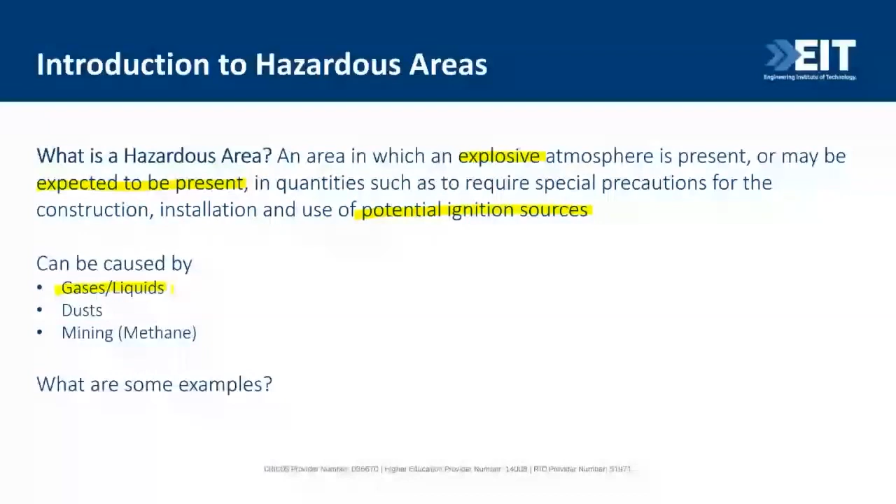So in each of these scenarios, you either have a hazardous material that is one of three things: it's a gas or a liquid that emits a gas, it's a dust, or in a special case you might have methane, which is related to mining.

So some other examples - we've run through a bunch of them, but now that we know it could be a liquid, gas, or dust, thinking of the context of refueling stations, that would be a liquid or gas example. In the context of grinding, or say flour or sugar refineries, that would be a dust that could cause a hazardous area.

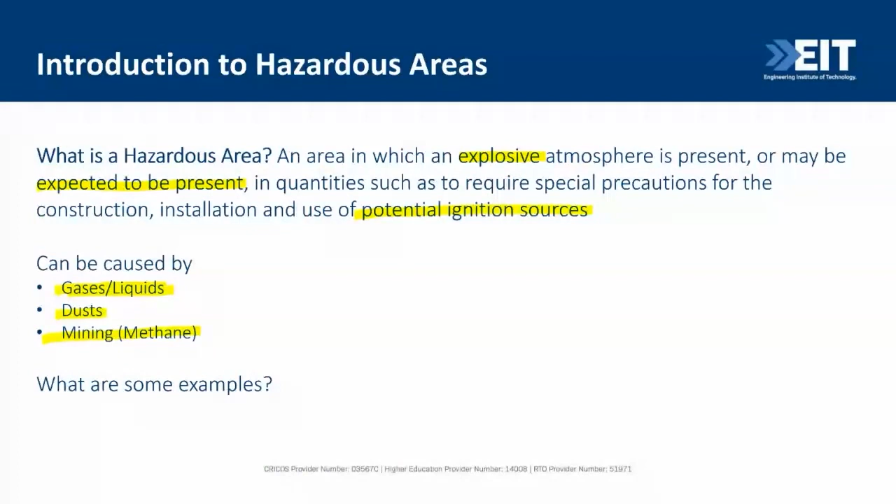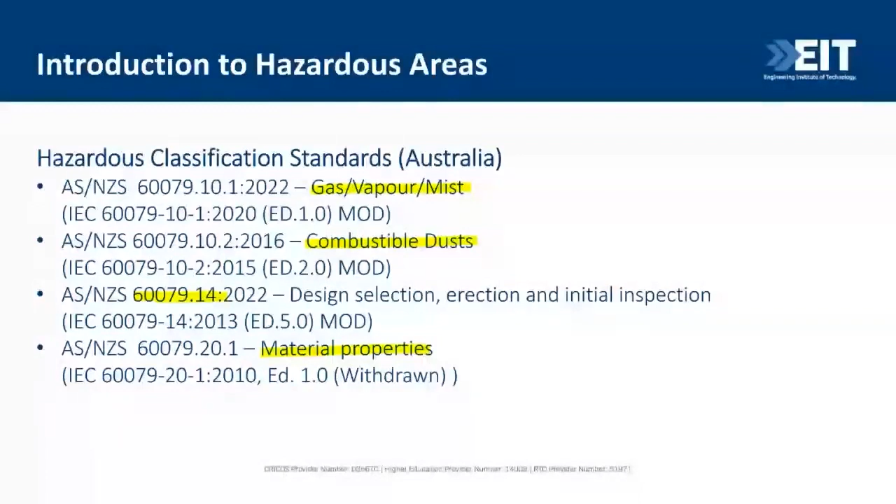So the standards applicable in Australia, which also correlate overseas to the IEC standards, are listed here. For each of those materials, they have their own standard. For gas, vapors, or mist, it's 60079-10-1. Combustible dusts have their own standard. Then there's a dedicated standard for those involved in electrical work - how you design, select, erect, or do inspections for hazardous areas, and that's Part 14 here in Australia. Lastly, there's a standard that gives us some typical material properties. It has been withdrawn, but it's often helpful just to get a bit of background.

A key distinction to understand is that when we're talking about liquids, gases, or dusts, they do not include explosive hazardous areas. So EHA are a different form of hazardous area, and they're covered by a completely different set of standards. For example, if you work in defence, there is a dedicated standard for how you classify and deal with explosive hazardous areas.

Now, another tricky word that people get confused is the concept of hazardous materials and dangerous goods, and they're often used interchangeably. The difference is dangerous goods is broader. So you could have dangerous goods that are corrosive, toxic, oxidizing, or water reactive, but they may not have the potential for a hazardous area.

So they're slightly different. If you want to classify dangerous goods in Australia, again there would be a relevant standard for the country you're in. We have a dedicated standard called the Australian Code for the Transport of Dangerous Goods by Road and Rail. So essentially there will be dedicated standards for dealing with dangerous goods that are separate to those we deal with for hazardous areas. That's the important distinction to take away from this slide.

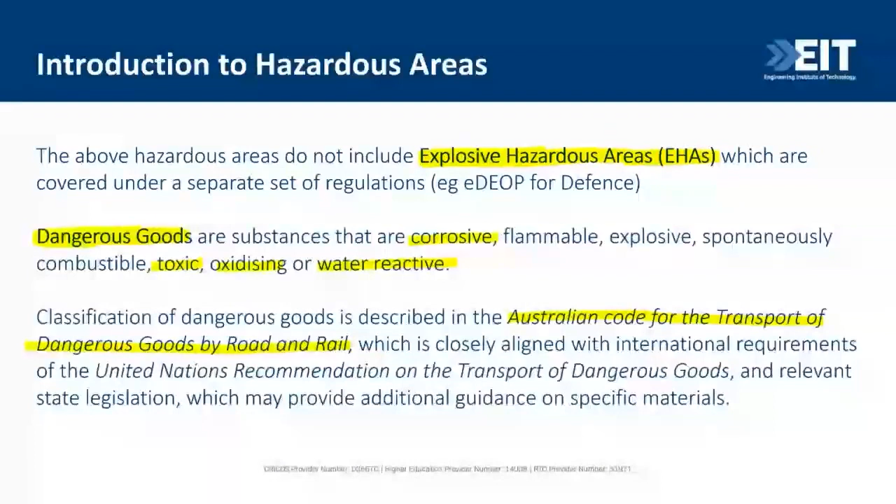Okay, so how do we get an explosion? Well, if we look at the fire triangle - or the infernal triangle - if you have a flammable liquid or a gas, this triangle is how we get an explosion. We take our fuel, which is often the gas associated with a flammable liquid, mix it with oxygen into a mixture with the right balance, introduce an ignition source, and then we get fire. Think of your old camping fire: your fuel would be your wood, you have oxygen in the air, and you introduce your ignition source. That's what we call the infernal triangle.

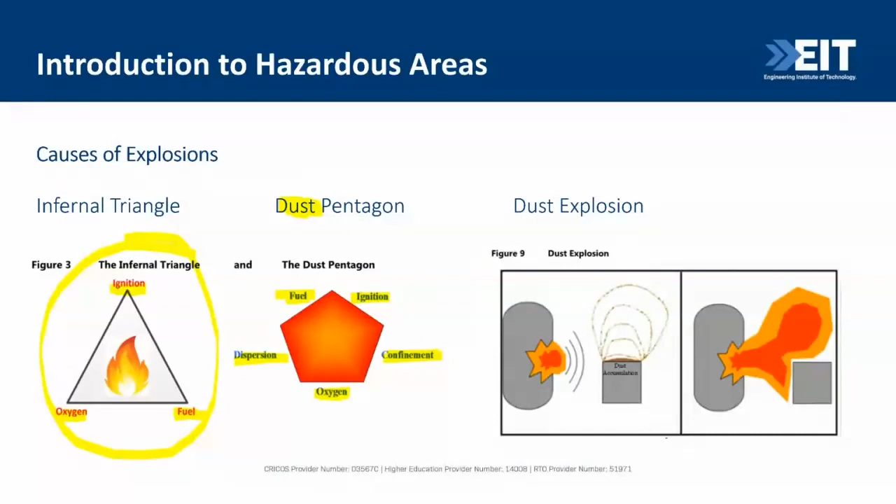So you need those three things to have an explosion. For dust, it's slightly different - we still need our fuel, oxygen, and ignition, but what we need for dust is for it to be dispersed in air and confined within a set space. Dust explosions are slightly different; they're often much more destructive because there is, funnily enough, more energy contained in a dust explosion than an equal amount of TNT. What's interesting is approximately 75% of man-made dusts are actually combustible, meaning they could represent a potential hazardous explosion when mixed with air in the right proportions with dispersion and confinement. We mentioned earlier sugar and flour refineries as combustible dusts. You can also get grain, linen, milk powder, coal, and metals - a lot of the dusts we often produce could be combustible, so you might have the potential for hazardous areas.

All right, so let's talk through the classification terminology. Essentially, the first thing we do is determine what's known as our zone, and we're going to go through all of these definitions in a second. But the first step is our zone. Then we look at whether we have either a vapor and gas, or a dust. Based on that, we apply one of our zones - so they're either 0, 1, 2 or 20, 21, 22.

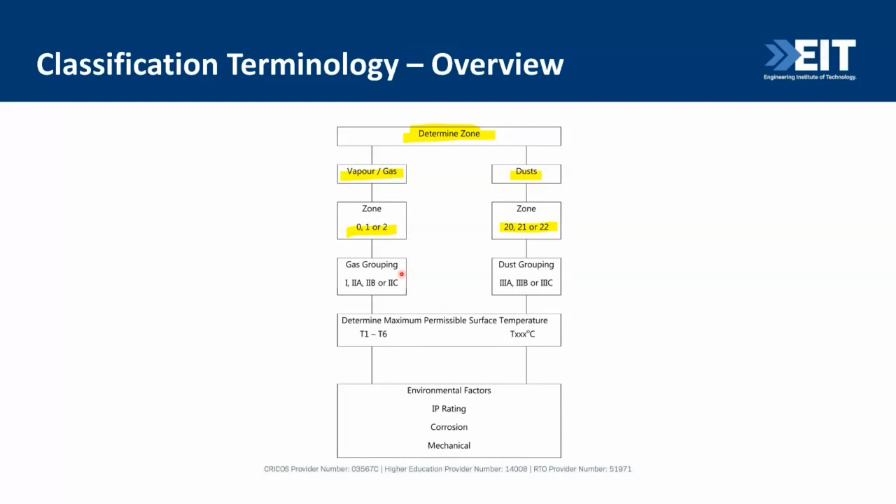So, 0, 1, 2 or 20, 21, 22, depending if you have gas or dust. We then assign what's known as a grouping, which is shown there. We then assign a maximum permissible surface temperature, so a temperature limit. Those are the first three terms that will be defined: your zone, your grouping, and your temperature limit.

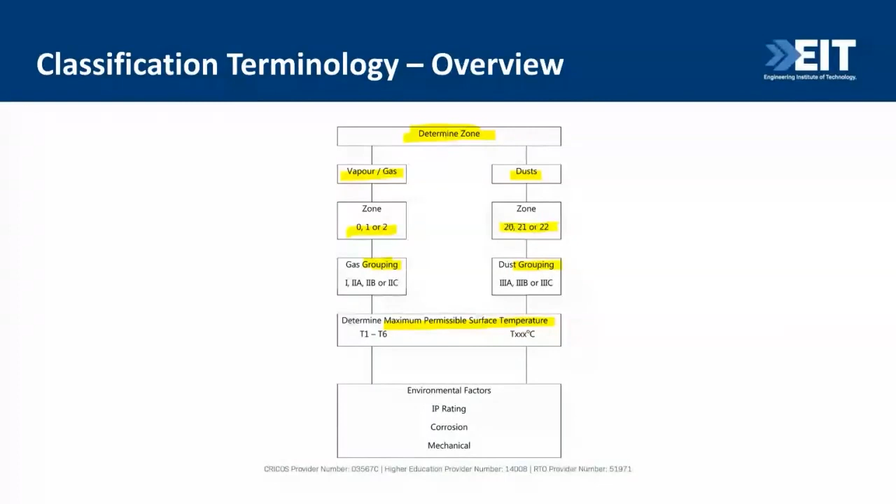Then there's a couple of ancillary things that we'll have a look at, like the environmental factors. Do we need IP rating? Do we need to prevent it from corrosion? But the key ones are shown up here.

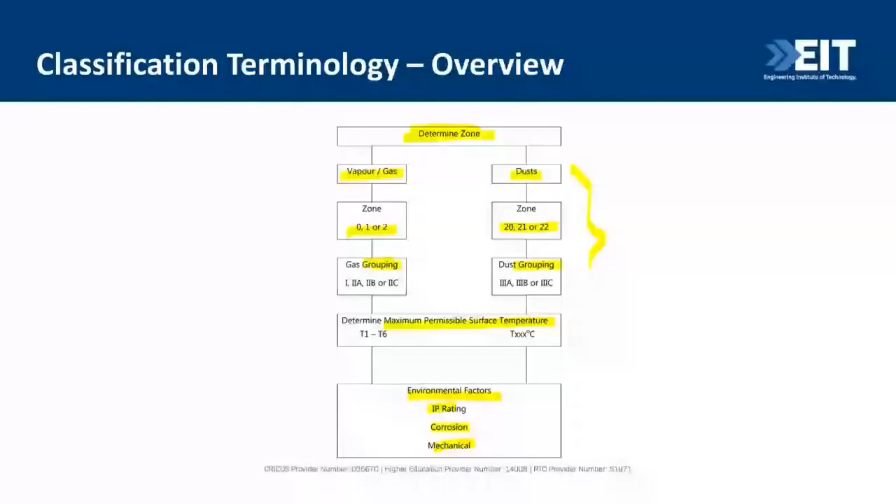So the zone, when we're talking about zone, it's the probability of a hazardous area forming within an area and how long it exists. If you have a zone 0, it's very likely that you have a hazardous area all the time. If you have a zone 2, then it's much less likely, or if you do, it'll be for a very short amount of time.

Zone 0 for our gas and zone 20 for our dust are the most onerous. Just to recap, 0 is where, by definition, you have an explosive gas atmosphere present continuously or for long periods. Zone 1 means it's just likely to occur, while zone 2 is where it's not likely to occur, but if it does, it should be for a very short period. So we're really going down in likelihood.

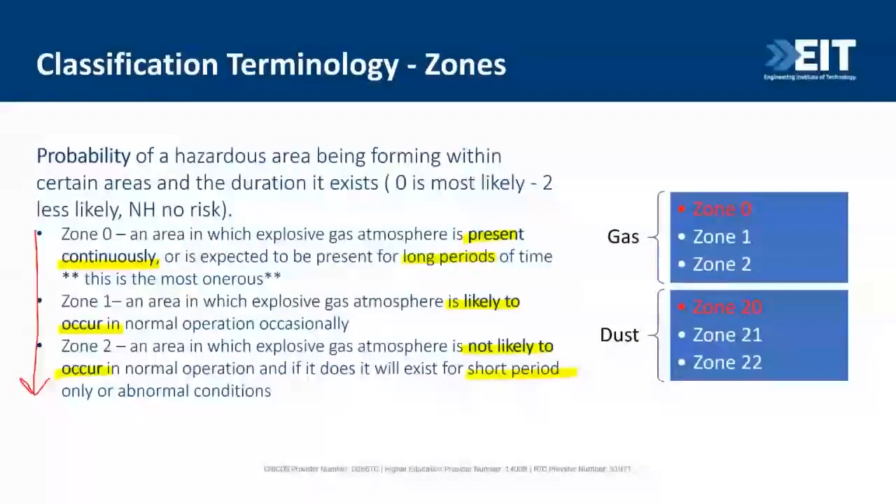Now the next one is our group, or our material group. So we've looked at the probability. Now we look at the properties of the material that are causing the hazard. So it's either group 1, 2, or 3. 1 is specifically for that mining application, which we're not going to be talking about today. 2 is our gases, and 3 is our dusts.

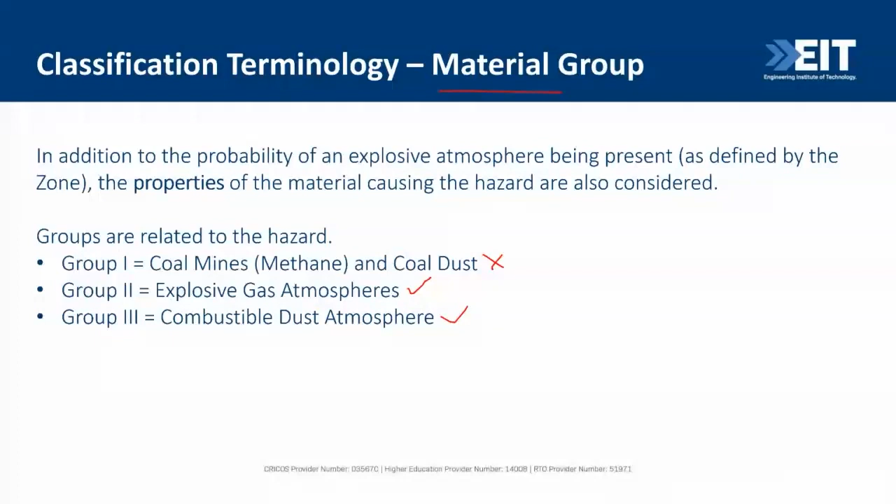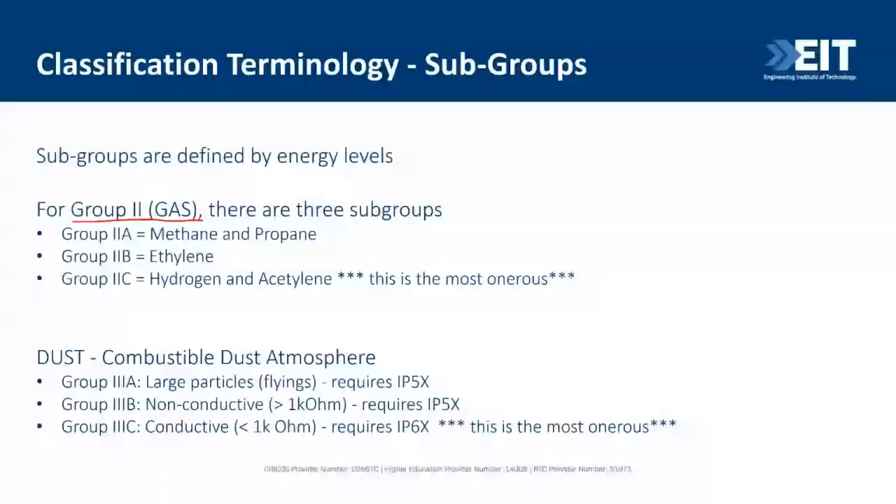So for our gas groups, which are group 2, there are subgroups. The subgroups are defined by the energy levels. So we have 2A, 2B, and 2C. Our 2C here is the most onerous. What we mean by that is materials classified as group 2C need the smallest amount of energy to ignite. So for reference, our 2C only needs 20 microjoules.

So if you have a meter length of cable, 2.5 square mil final sub-circuit cabling, and you apply a 500 volt megger, that spark is equivalent to 20 microjoules. And that's all that's required to ignite a group 2C material. Next up from that would be 2B, which requires about 60 microjoules, and then 2A, that requires about 160.

For dusts, the concept is very similar. We have 3A though, because it's dusts, 3B and 3C. 3C is our most onerous. These are defined by how conductive those dusts are. So group 3C is what's defined as conductive, which is less than a kiloohm. 3B is non-conductive, 3A is your larger particles. So be wary, especially of your 2Cs and your 3C groups.

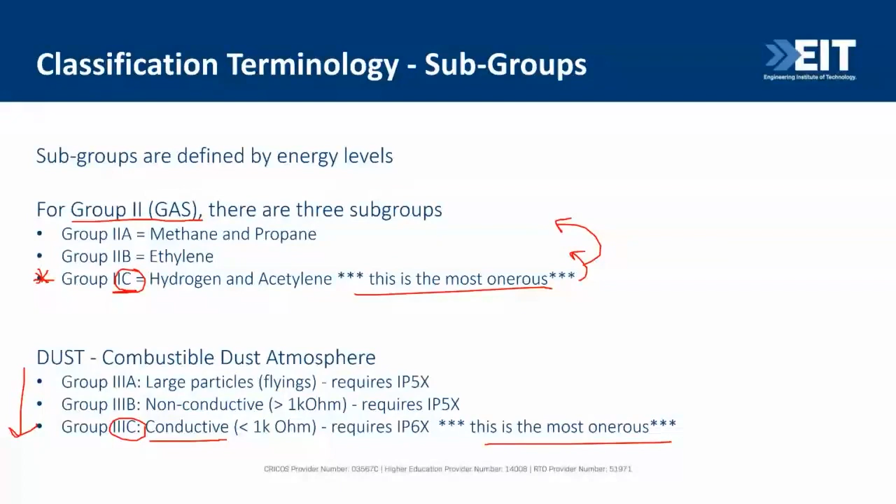So if we now put that all together, our group 1 is our methane or our coal dust. Our group 2 is our gases, and we could have 2A, 2B, or 2C. Our group 3 is our dusts, and we could have 3A, 3B, or 3C, with the C's being the most onerous.

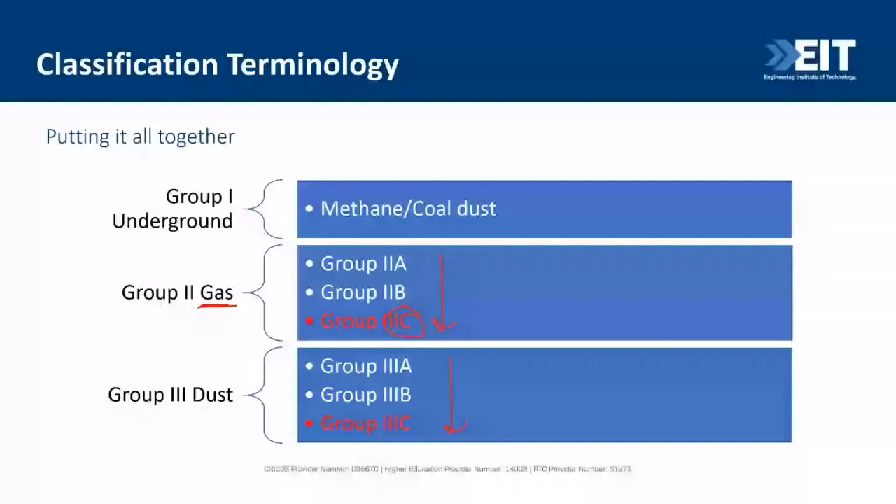Okay, so other terms that you might hear is flammable versus combustible. Flammable is the one that we care about. It means it can ignite and we can have an explosion. So if your material can ignite below 61 degrees, if you introduce an ignition source or equipment at a temperature less than 61 degrees and it will ignite that gas, you have a flammable gas. If the ignition temperature is greater than 61 degrees, you have what's known as a combustible gas or combustible liquid.

Now, if your material is combustible, it is not considered a hazardous area. So you don't have a zone 0, 1, 2. You don't have a group 2A, 2B, 2C. It is not flammable. So if you have combustible liquids, you don't need any special installation requirements. If you have flammable, then you need EX rated equipment because you have that hazardous area.

Now, a common application for that is on the topic of fuels. Petrol is a flammable liquid. Diesel is not necessarily a flammable liquid. You can get high flash point diesel that is therefore combustible and often considered safer.

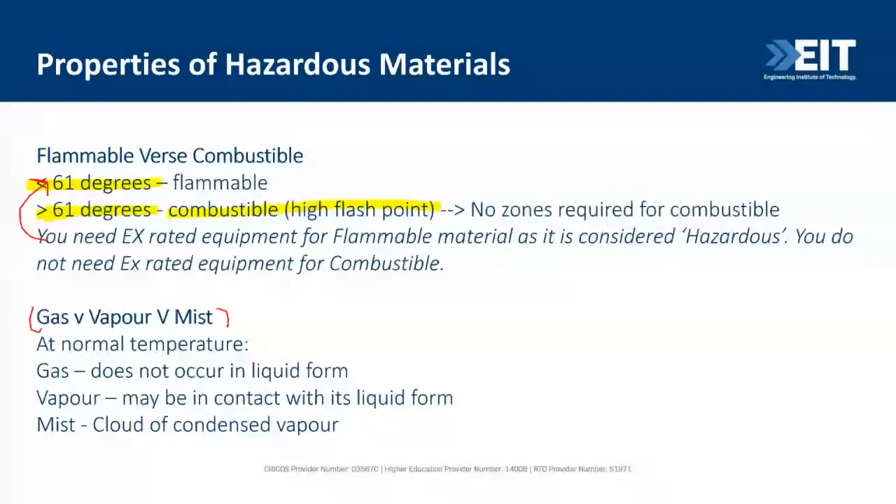All right, so if we move on to the properties of hazardous materials. So the things that we need to know when doing a hazardous classification is at what temperature will my material automatically ignite? We need to know this to determine if it's flammable or combustible, with that 61-degree limit.

That tells us, or helps us determine the likelihood of an explosion occurring without an ignition source, because that heat represents energy. Now, especially for dusts, dusts have different temperatures. If dust is sitting in a flat layer, it will ignite at a different temperature than if it's dispersed in a cloud. So one of the things we need to know when classifying is the automatic ignition temperature of each of the materials we might have.

The second part is slightly related, which is what is the minimum ignition energy in joules that I need to ignite my substance. So I can make sure that there is never that amount of energy that can come into contact with this flammable material, because if I exceed that minimum energy, I'm likely to have an explosion. So I need to know what that threshold is.

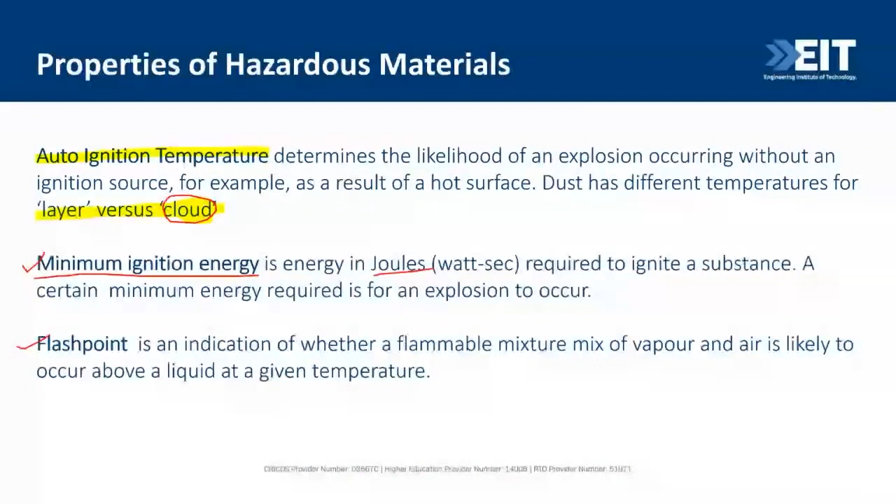And the last one is what's known as flash point, still relating to ignition and energy. In this case, our flash point is whether a flammable mixture, where we have our vapor mixed with our air in a certain quantity, is likely to occur above a liquid at a given temperature. So it's a combination of the mixture and the temperature that will cause ignition. So three different properties, all relating to ignition and temperature or energy, that we need to understand about each hazardous material we might be classifying.

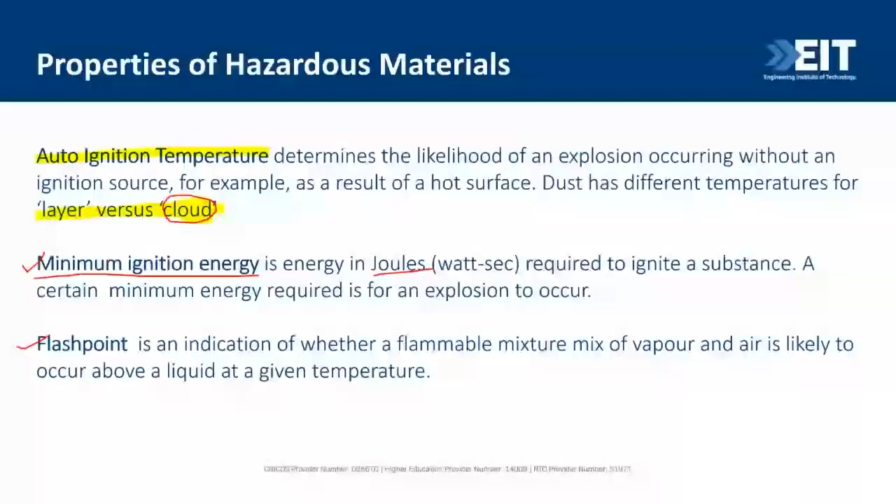So for an explosion, we've talked about our fire triangle and our dust pentagon. In both of those, we have a mixture of a flammable material with air. So to have an explosion, we need the right mixture of air or oxygen with that flammable gas or vapor. Only when we have that right can we have an explosion, which also means from a safety perspective, if we can avoid that mixture, then we will not have an explosion.

So the range that defines that area is what's known as our explosive limit, specifically our upper and lower explosive limit. If you take a concentration of material, let's make it up and call it 70% UEL, our upper explosive limit. So if you mix 70% of your material with 30% oxygen, for this material it becomes too rich to ignite. Now let's say if I take 10% of my material with 90% oxygen, if that's my lower explosive limit, then the mixture is too lean, meaning there's not enough fuel in that 90-10 mixture for it to ignite. So those are our safe zones.

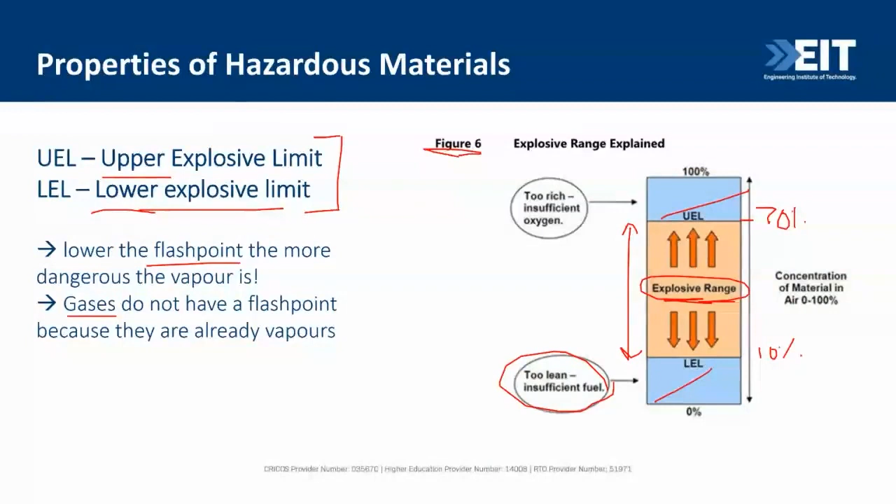So if you looked up 60079 Part 20 Part 1, or the IEC equivalent, or a safety data sheet for any particular hazardous or flammable liquid or vapor gas, you'll be able to find a lot of those material properties that we were just talking about. So this extract here is taken from the standard.

However, it just goes to show you could look up, say, acetone. Very common in laboratories, you might find a lot of it in a nail salon. It has a boiling point of 56 degrees, a flash point of -20. It will automatically ignite without an ignition source at 465 degrees. Now we know it's a liquid that emits a gas, so it's a group 2, and based on how much energy is needed to ignite it, it's a group 2A.

The data sheet will also give you your LEL and your UEL. So at 13% acetone to oxygen, above that 13% concentration, you won't have potential for an explosive atmosphere. Similarly, if you're below 2%, your mixture will be too lean, and it also won't have the potential to explode. But if you mix acetone with oxygen in the range of 2.15% to 13%, that's when you have your danger zone. That's when you have a mixture that could cause an explosion.

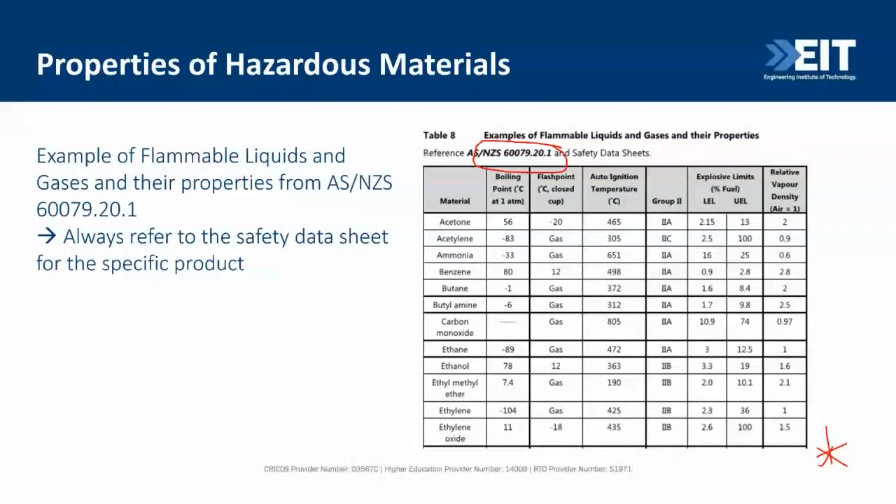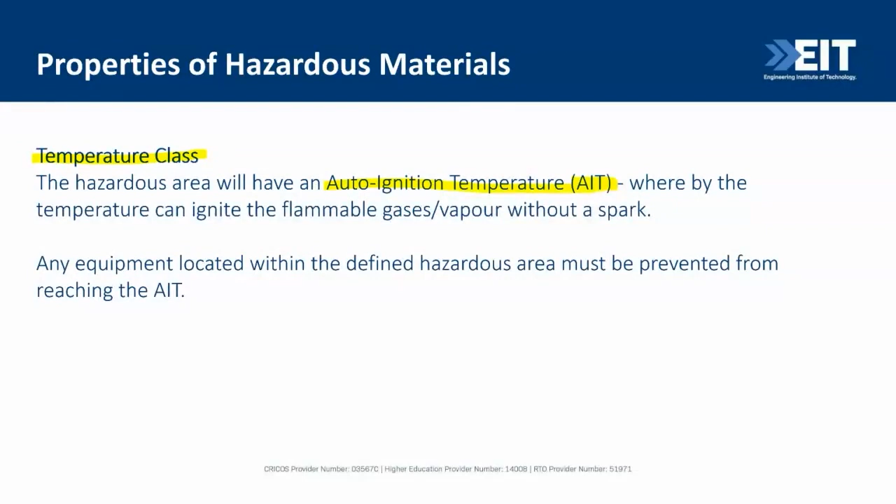The other thing we look at, since everything is tied to temperature: we've looked at zone, we've looked at group, now we'll look at temperature class. The hazardous area, which is your mixture of material with oxygen, will have an auto ignition temperature, or AIT. This is the temperature that can ignite the flammable gas and vapor without a spark, so we don't need that fire triangle or the dust pentagon. We can rule out an ignition source, and instead that temperature is the fuel needed to ignite.

So what we need to do is, if we know the temperature at which that mixture will ignite, we make sure nothing around that hazardous zone can reach that temperature. This is really important for equipment, because if we're going to put a compressor next to what's producing dust, we need to make sure that compressor doesn't reach that auto ignition temperature.

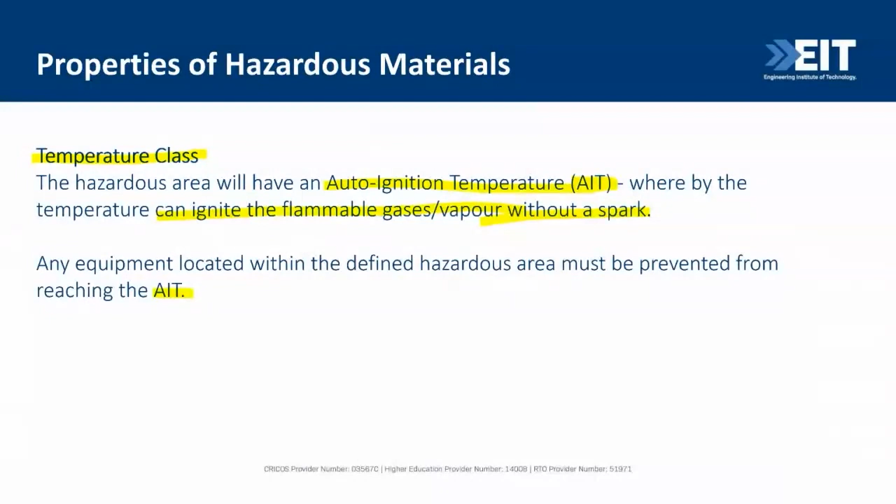So there are predefined ranges, called temperature zones 1, 2, 3, 4, 5, 6. These have defined ignition temperatures for gas and vapors, so our Group 2s: T1 is 450 degrees, T6 is 85 degrees.

So if you have a gas that could ignite at... actually we have examples here. Hydrogen, as an example: if hydrogen will automatically ignite at 560 degrees, then we need to rate our equipment to one of these T zones to make sure it never reaches 560 degrees. 560 degrees sits here, so in that case we can have T1 equipment because it won't exceed 450. We could have T2 equipment because it won't exceed 300. In fact, we could have T3, T4, T5, or T6. So for a hydrogen installation, your equipment just needs to be rated to any one of those values.

If we look at ethylene, it's rated to 425 degrees, which sits about here. So if we have equipment rated to T1, adjacent to where we could have an ethylene release, that equipment could reach 450 degrees and ignite our ethylene. So for ethylene, we instead have to have equipment rated only up to T2 - so T2, 3, 4, 5, or 6, because that will ensure nothing reaches 425 degrees.

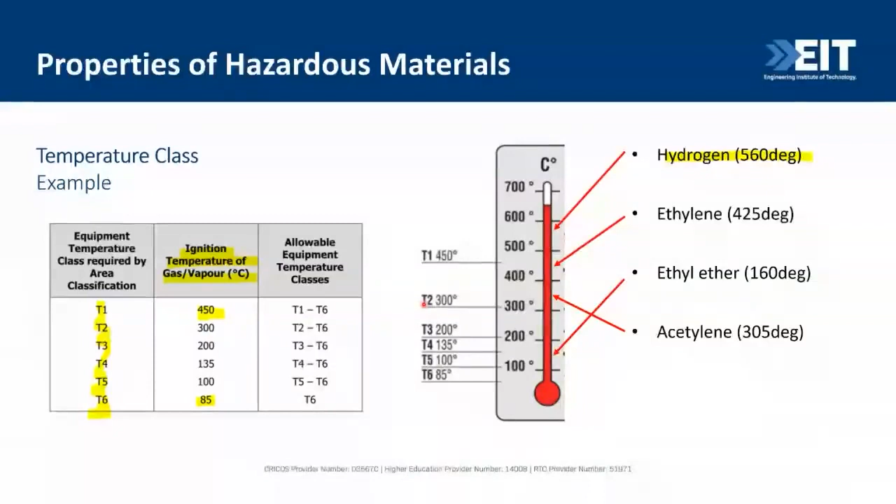So the process now of hazardous area classification - why do we even classify? Why do we go through this process of zones and groups and risks and distances and equipment ratings? The reason is, if we identify a high probability that you might have an explosive atmosphere, we can put control measures in place to make sure either that atmosphere doesn't come about, or if it does, it won't lead to an explosion. We do that by removing ignition sources, reducing the ignition energy, monitoring ventilation, and monitoring temperature. Any one of those control measures will then control the risk of our explosion.

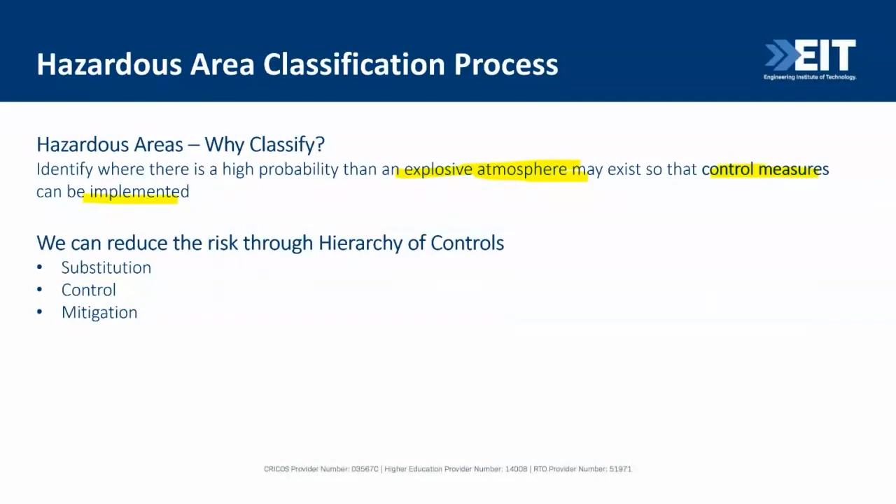So the hierarchy of controls is substitution, control, or mitigation. If we substitute, perhaps we simply replace the hazardous substance - maybe you can run diesel equipment instead of petrol, and you immediately no longer have the risk of an explosive atmosphere.

For our control methods, perhaps we can reduce the amount of flammable substance we've got, or limit when it would be released. We could even, this is where we avoid ignition sources, put in those T ratings of equipment, or add additional ventilation so you don't get a mixture within your UEL and LEL limits.

Your mitigation is your least preferable control method. This is where you reduce the number of people involved in that presence, or how, if it does have an explosion, it would propagate through the rest of your system. Mitigation is more along the lines of your PPE. Something is going to happen, so how can we just mitigate the effects of it, as opposed to controlling the likelihood of having that explosion in the first place?

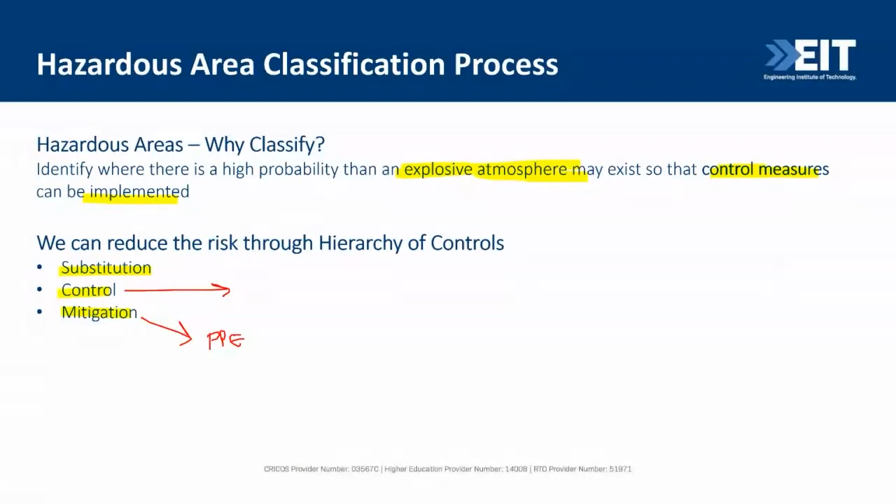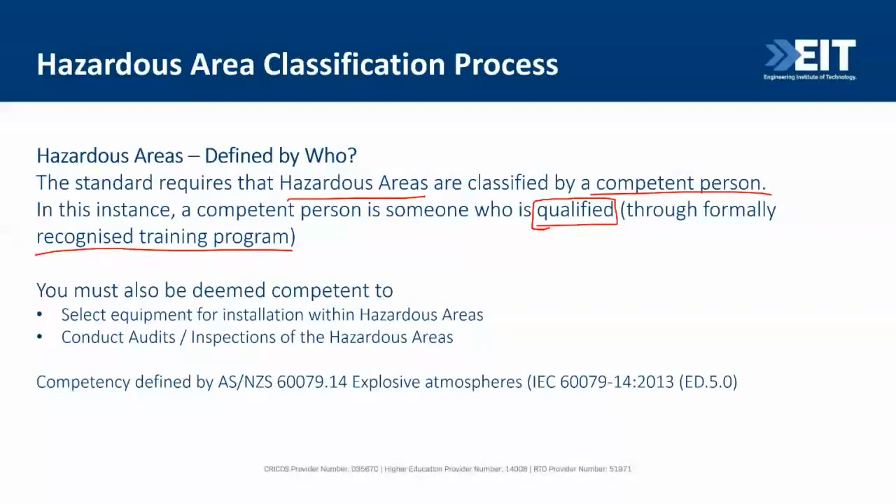So who can define a hazardous area? It does depend on countries and legislations. In Australia, to define a hazardous area or classify it, it must be done by a competent person. A competent person is someone who has a qualification to do so, and not any old qualification, but one that is recognised through a formal trainer. So someone does that course and obtains that certification. That's how you classify hazardous areas.

To be the person who selects electrical equipment to go in those hazardous areas is a separate qualification as well, so you need to also be a competent person to select electrical equipment. And if you want to conduct audits or complete inspections, that again is a separate qualification. So there are three different competencies or three different roles at play in hazardous area classification - that might be one person or three different people. Those competencies in Australia are defined under 60079 Part 14. It does have a corresponding IEC equivalent, but again, it will come down to your legislation.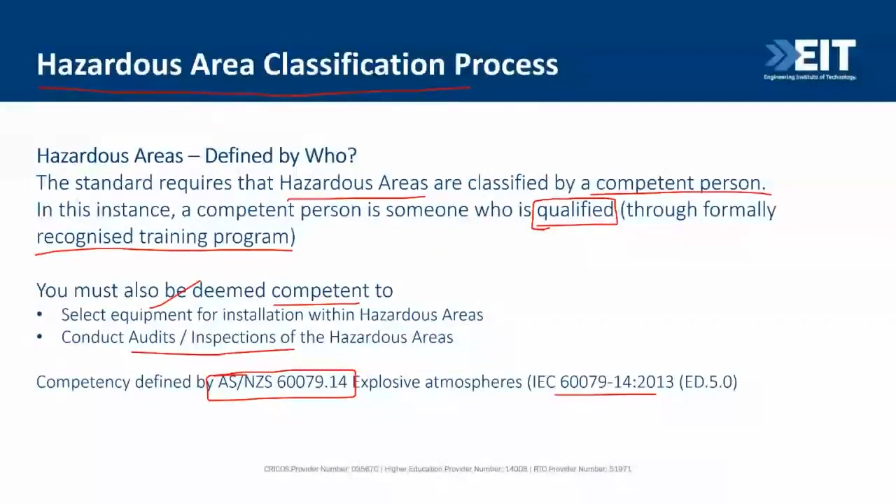So the process of defining hazardous areas: first we have to define what our hazard is. Then it comes down to the probability of having that perfect storm - material with oxygen, with an ignition source or a temperature occurring. Then we document the risks. This would be reports, these would be drawings, and these would be held by the people using that facility.

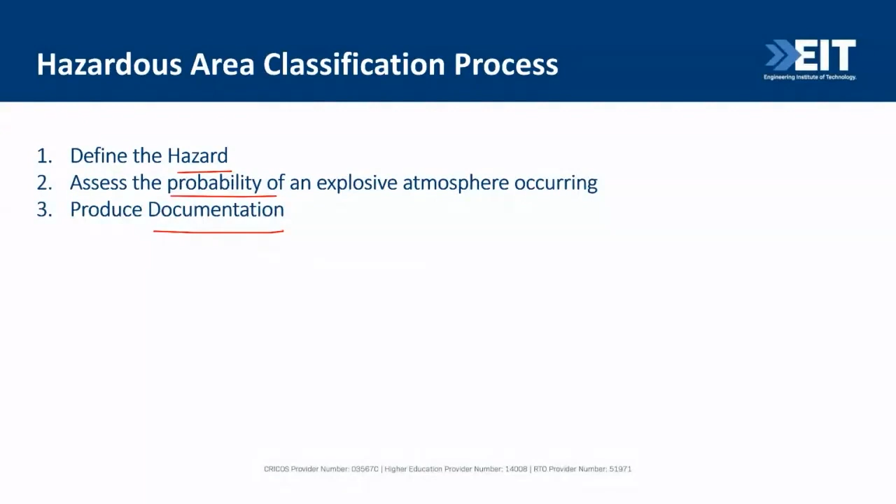So when defining the hazard, first we look at the personnel influences. What maintenance operations do you have? What operation procedures or processes are occurring nearby? How do you evacuate from the building? This feeds into your risk of hazard. Does it pose a health risk to personnel? Is there a firefighting system? Is there a control room outside the hazardous area, or will you have to run into it in the event of an explosion? So that's the personnel side of the hazard.

The second side of it is understanding the actual process itself. So what temperatures and pressures are you dealing with? What's your storage and handling process? Do you have bins? Do you have open lids of containers? Do you have storage cabinets? What is your actual process for storing and handling those materials?

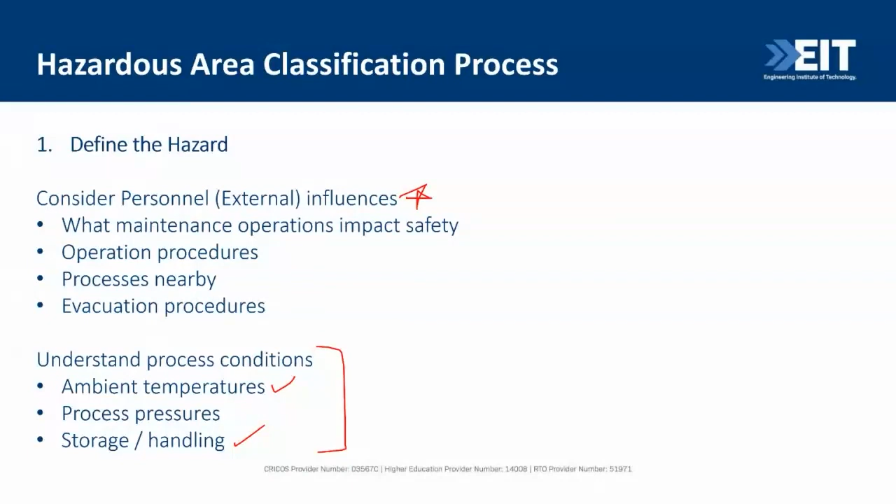Once we know those two things, we then look at the probability. This is where we do those zones, those groups, those temperature limits. First we look at where we could possibly get a release of a flammable gas or a combustible dust, and how frequent that release is. Zones are your probability. Is it a continuous release, like a vent, or is it an intermittent release? Do we expect it in normal operations, or is it only if something fails, like a valve fails, you might get a release of gas?

We then look at the ventilation around the space, because it's about that mixture of material and air. If we can dilute that mixture, we've got less probability of a hazardous area. Or if it's the opposite, and we have a release of this material in a confined, shuttered room that has no ventilation, your probability goes up. We define ventilation as being adequate or not adequate.

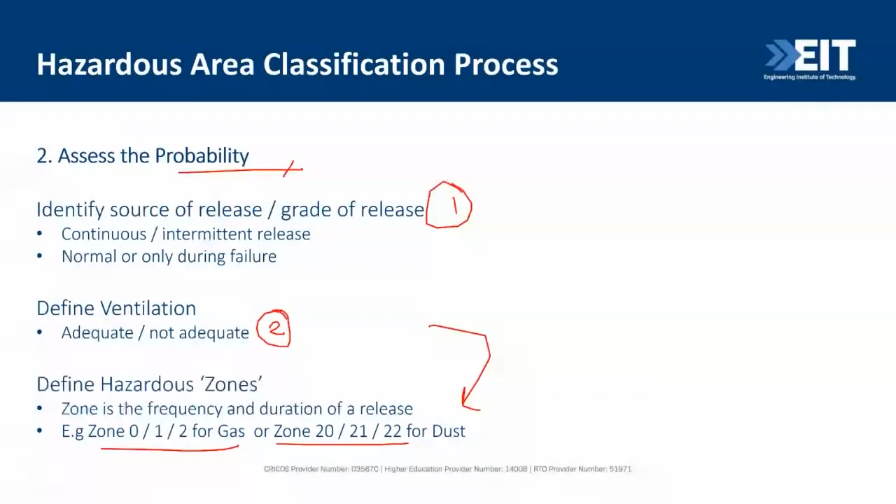These two things will help drive what zone we have - do we have a zone 0, 1, 2 in the interest of gas, or a 20, 21, 22 for dust? It seems simple enough to do, but it's all about really understanding the process - how that material moves around your building, how it's used, what's normal operation, what's abnormal operation. If your equipment fails, what could that cause? Do we have a risk or a probability of a hazardous material in that case? Do we have risk of a hazardous zone every time we conduct maintenance because we're opening and closing things?

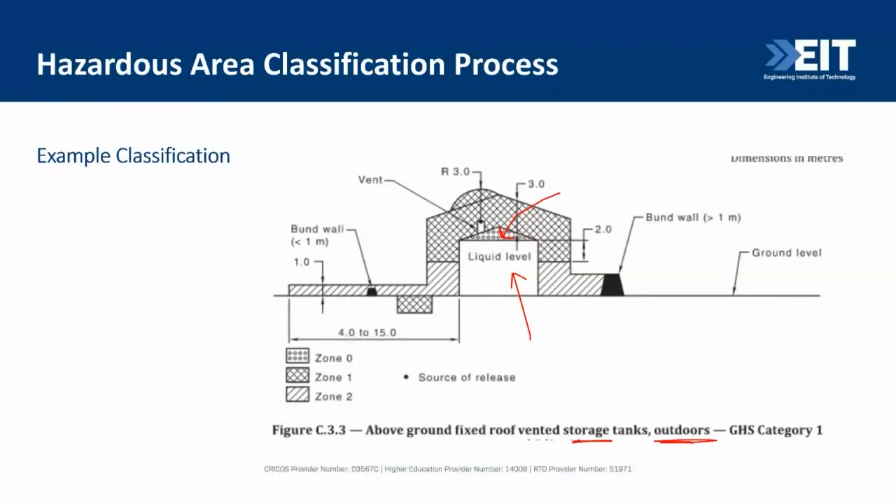So, for example, this is a hazardous area classification taken from our Australian standard. You can see here a typical classification example where we have a storage tank, located outdoors - that's our tank here. Now we know it's not the liquid that will explode, it's the vapor and gas associated with that liquid that gets trapped within the roof of our tank. We have a hazardous zone associated with our vent because in normal operation it continuously releases those gases. We also have a zone around our building, which is our zone 1.

Zone 0, which is our most onerous, is the zone that's inside our tank. So that's our 0, that's our 1. Outside of that we have our final zone, which is our zone 2. So in this case, it says there's a zone 2 up to a bund or a distance of 4 to 15 metres.

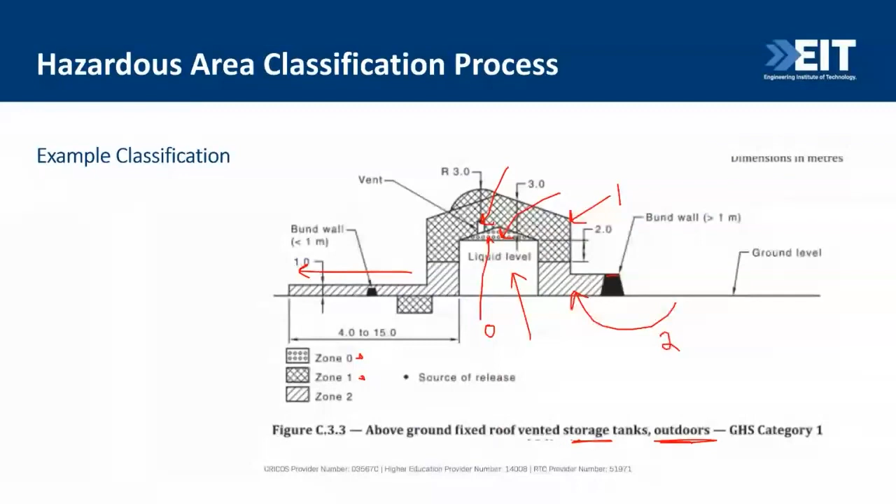So this is what's known as a hazardous area classification drawing, and it will form part of phase 3 of this classification process, which is our documentation. Every time a hazardous classification is done, it typically is done in a report format. And that's because we need to record everything that goes into that resulting classification.

So it gives us the background, and if the client has any comments, what assumptions we've had to use in classifying, any of those material characteristics, so what SDS we referenced, what temperature, what pressure it's run at, what our ambient is at our site, is it indoors, is it outdoors, what was our assessment of the ventilation and how did that feed into the actual classification. So anything that was a basis on certifying our zones, our types, our groups needs to be recorded in our report.

Now the drawings are just a really handy way of visually seeing the extent of the classification. It's very easy to say 6 meters laterally, half a meter above every oil drum, but drawing it shows a lot more clearly what those extents are. So the drawings need to contain all that useful information: the type of zone, so is it a 0, 1, 2, 20, 21, 22, and the extent of that zone.

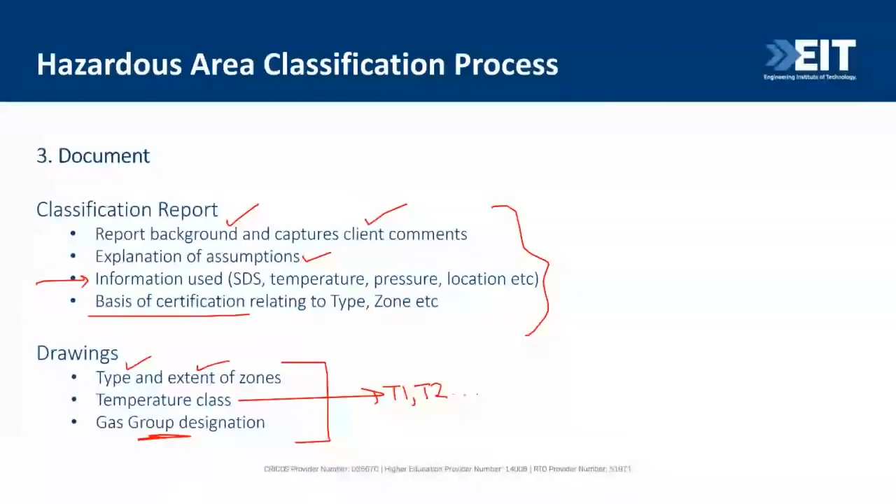Now these documents are held by the people who operate that building or own and run that building, and it's a live document. It often forms part of what's known as a hazardous area dossier, and that's what's kept by the building owner within that building. So it can be referred to, it can be updated as your processes change. If you want to change the building or change how you do a particular process, then that needs to be reviewed. So it's a constant iterative process.

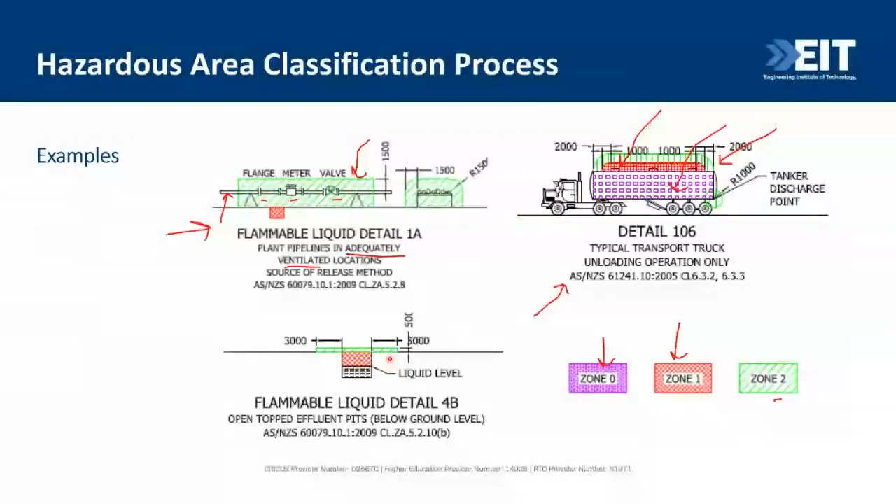So those are the pictures, or some example pictures, of that hazardous area classification all rolled into one.

So the summary of today is to understand that you might have hazardous areas in any existing building that you operate in or in new installations. And they might be hazardous because you could have liquids, vapors, gases, or most commonly, combustible dusts.

Now just remember that flammable is different to combustible. A liquid might be flammable, like petrol, or it could be combustible, like diesel. Be conscious of terminology like hazardous and dangerous goods—there's a slight distinction. Dangerous goods could also be hazardous, but not all hazardous materials are dangerous goods.

Now for gas groups, we have 2A, 2B, 2C for gases depending on how much energy is needed to ignite them, and a zone 0, 1, or 2 depending on the probability. For dusts, the concept is similar, but we have 3A, 3B, 3C, and zone 20, 21, 22 for our probability and zone.

And if we were to summarize that classification process, what we want to do is define our hazards—our materials, the process, the probability of actually having a hazardous area—and then we document that.